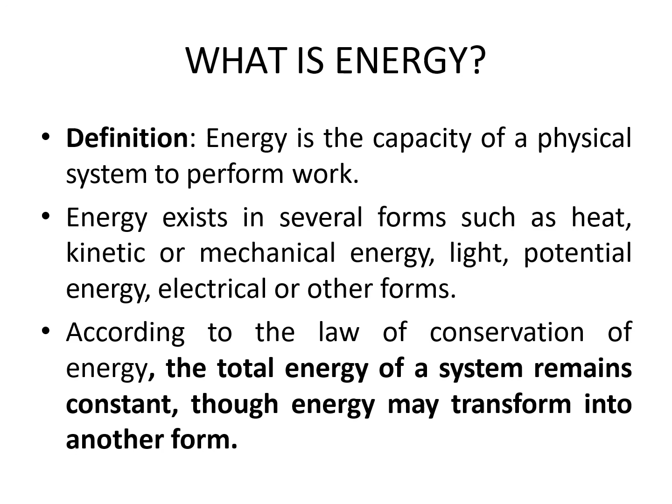Firstly, we discuss what is energy. Energy can be defined as the capacity of a physical system to perform work. Energy exists in several forms such as heat, kinetic or mechanical energy, light, potential energy, and electrical energy, or other forms. According to the law of conservation of mass or energy, the total energy of a system remains constant, though energy may transform into another form.

Next we'll discuss the types of energy. After the definition of energy, firstly we need to know what types of energy exist. Types of energy include mechanical energy, thermal energy, nuclear energy, chemical energy, and electromagnetic energy.

Mechanical energy is the energy that results from the movement or location of an object. Mechanical energy is the sum of kinetic and potential energy. Next, thermal energy or heat energy reflects the temperature difference between two systems.

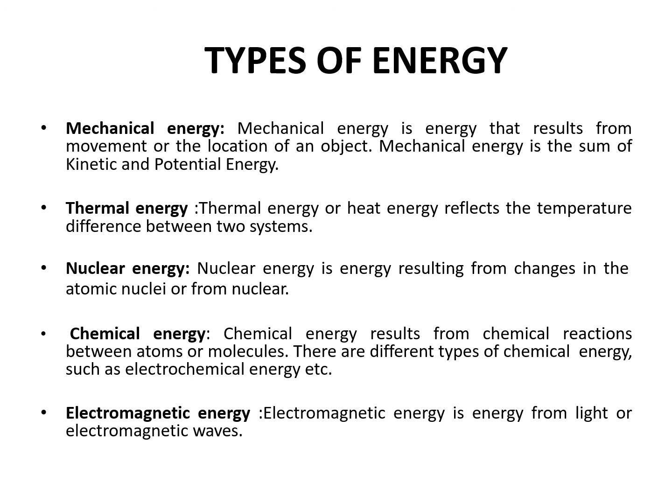Next is nuclear energy. Nuclear energy is the energy resulting from changes in the atomic nuclei. Chemical energy results from chemical reactions between atoms or molecules. There are different types of chemical energy, such as electrochemical energy, etc. Electromagnetic energy is energy from light or electromagnetic waves.

Now we discuss the definition and objectives of energy management, since today's lecture is on energy management and audits. So firstly, we look at what is the definition and objectives of energy management. The fundamental goal of energy management is to produce goods and provide services with the least cost and least environmental effect. This involves the judicious and effective use of energy to maximize profits, minimize costs, and enhance competitive positions.

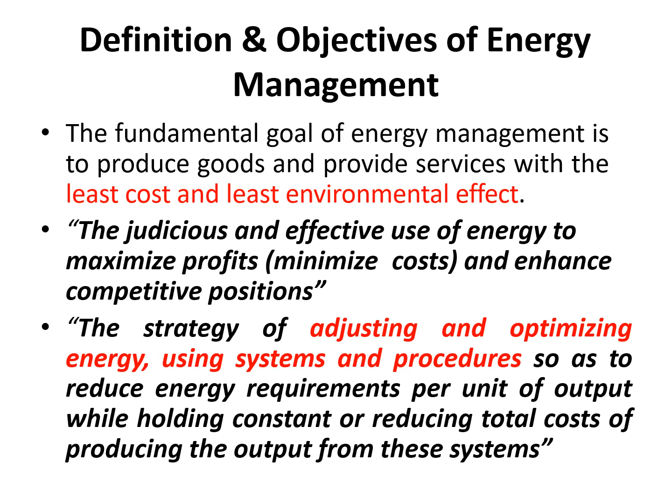Also, under the definition of energy management, it is the strategy of adjusting and optimizing energy-using systems and procedures, so as to reduce energy requirement per unit of output while holding constant or reducing the total cost of producing that output from these systems.

The objective of energy management is to achieve and maintain optimum energy procurement and utilization throughout the organization. This is the main object of energy management. Next is to minimize energy cost and waste without affecting production and quality. Next is to minimize environmental effects, which is also one of the main objectives of energy management.

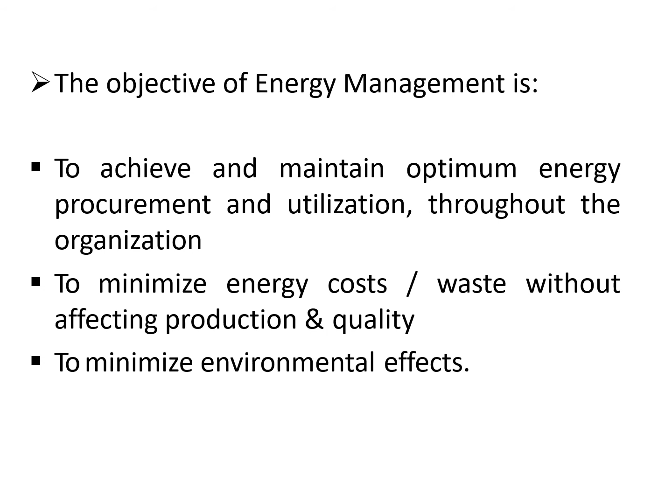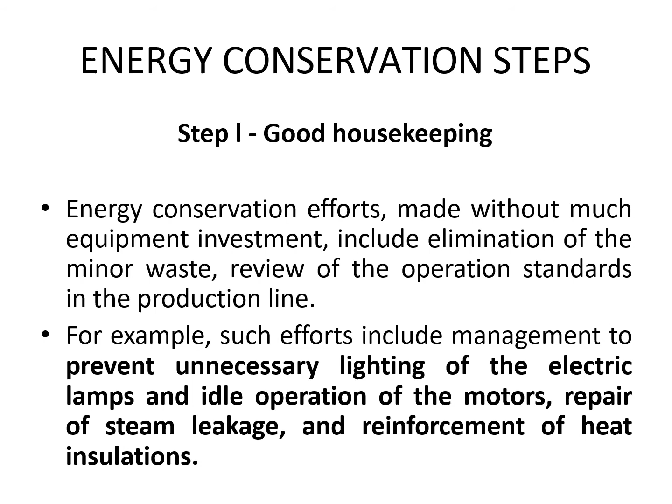Next we'll discuss energy conservation steps. The first step of energy conservation is good housekeeping. Energy conservation efforts made without much equipment investment include elimination of minor waste and review of operation standards in the production line. For example, such efforts include management to prevent unnecessary lighting of electric lamps, idle operation of motors, repair of steam leakage, and reinforcement of insulation.

Next, step 2 discusses equipment improvement. Step 2 of energy conservation involves improving the energy efficiency of equipment by minor modification of the existing production line, providing waste heat recovery equipment and gas pressure recovery equipment, or by introduction of efficient energy conservation equipment, including replacement by advanced equipment.

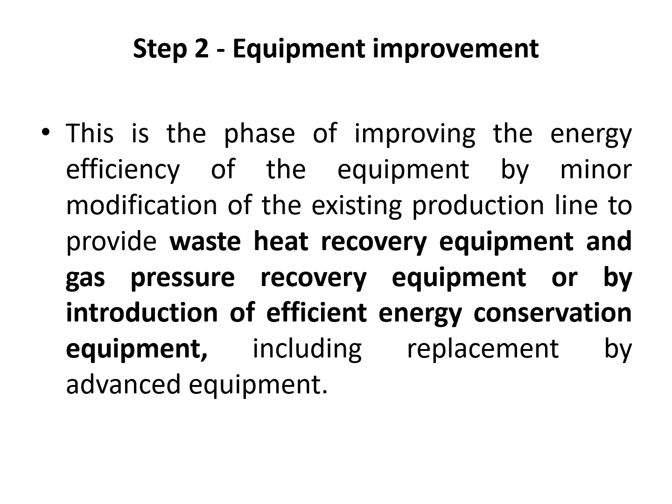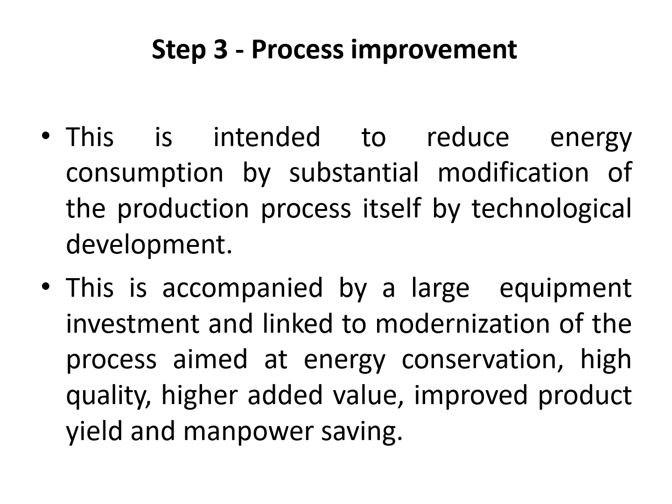Step 3 of energy conservation is about process improvement, to reduce energy consumption by substantial modification of the production process itself through technological development. Process improvement involves a large number of equipment investments linked to modernization of the process. The main aim of energy conservation is high quality, higher added value, improved product yield, and manpower saving.

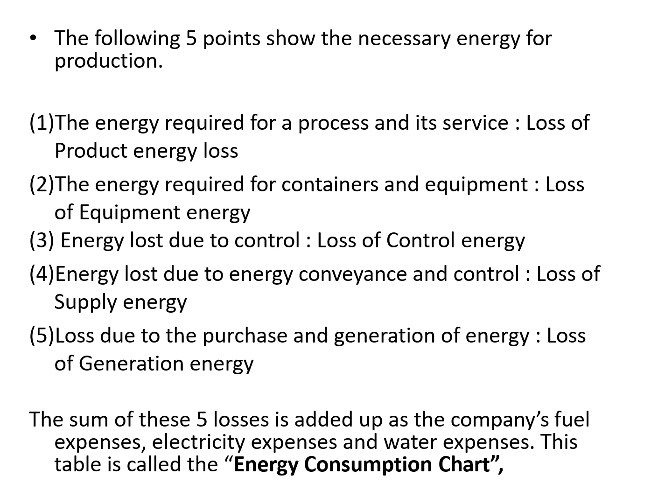So the sum of these five losses is added up as the company's fuel expenses, electricity expenses, and water expenses. This table is called the energy consumption chart.

Next, energy management is the process of monitoring, controlling, and conserving energy in a building, organization, or processing steps. Energy management systems are also often commonly used by individual commercial entities to monitor, measure, and control their electric building loads. These systems can also provide data that allows them to make more informed decisions about energy activities across their sites.

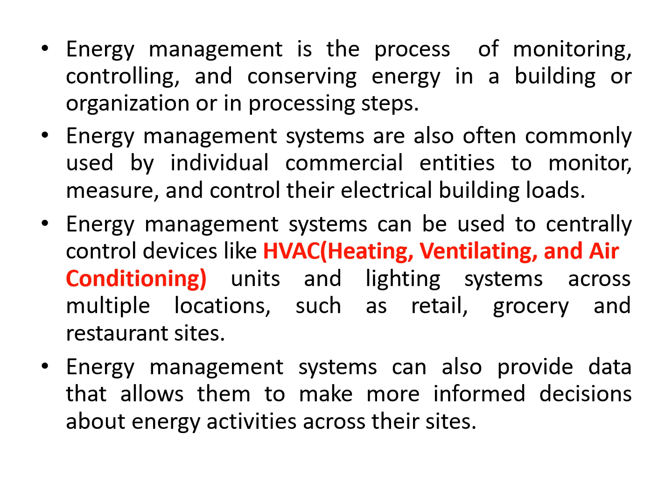Next, this is the tabulated chart of energy management in different sectors and different steps. We'll see this table for liquid and dry milk.

Also see the sector of sugar in different recovery of waste heat of filter in set of boiling pan stir, or also we see in the equipment sector, that is boiler.

In step 1, we see liquid milk and dry milk. So in first step, repair of steam leakage, combustion control, maintenance of the burner or nozzle. In second step, we see liquid and milk, dry milk case, waste heat recovery of drainage, preheat of feed water, modification of flash tank, insulation of boiler and valves also.

So this is the classification of energy management in 2 or 3 sectors, classified with the help of different steps, in liquid milk or dry milk case, in bread sectors or in beer sector.

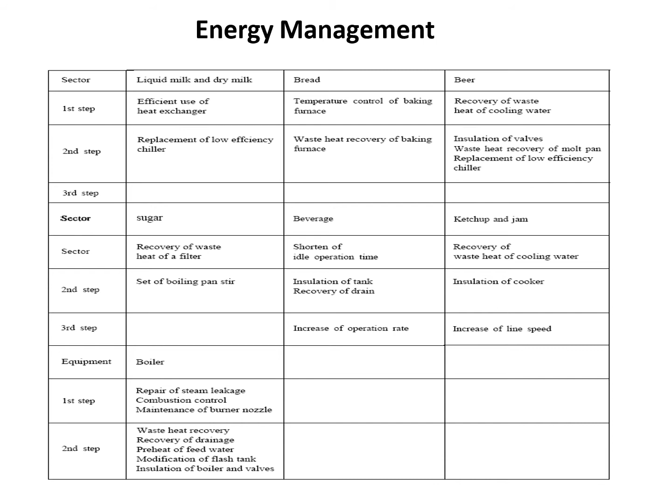Next we'll discuss energy conservation techniques in boilers. In first step, waste heat recovery is the most important technique for energy conservation. Loss of thermal energy occurs in boilers, and the waste gas heat in the chimney is particularly large. It is recovered by installation of an economizer in the chimney to preheat the feed water.

Next, energy conservation techniques will include combustion conditions. These are defined by fuel oil sprayed into the furnace from the sprayer nozzle of the burner tip. Controlling the diameter of the nozzle tip is important, because if the diameter is increased by 20%, the spray particles get bigger and more excess air is necessary to complete combustion.

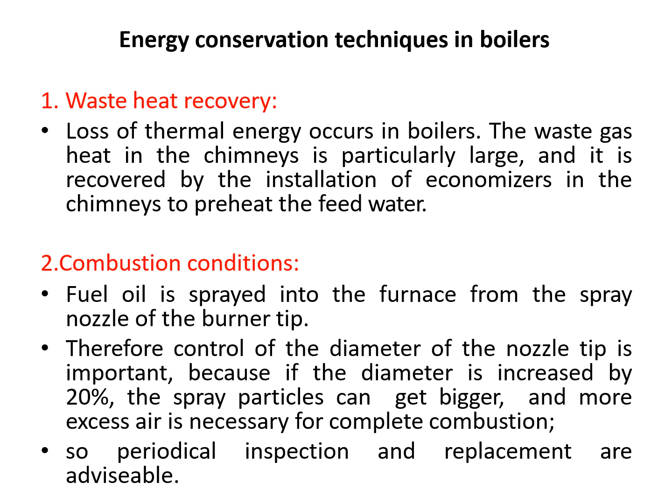So this is the point to point classification about energy conservation techniques in boilers.

In steam leakage, next we'll discuss. Steam generated by a boiler is passed through a pipe common to the adjacent boiler before being sent to the factory. So even when a boiler is not running, it is heated if there is a gate valve water leak, and this involves a loss.

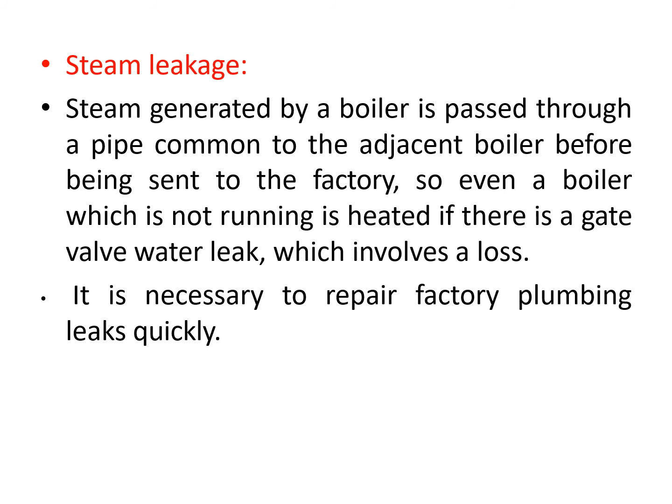So it is necessary to repair factory piping leakage quickly at different points.

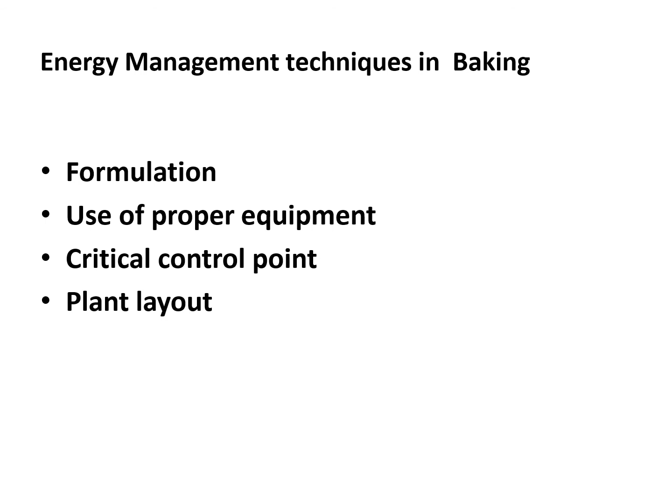Next, we'll discuss energy management techniques in baking. There are 4 points here: first is formulation, second is use of proper equipment, third is critical control point, and fourth is plant layout. In baking technique, we plan the energy management planning process with the help of different points.

Firstly, appoint an energy manager or energy team and assign responsibilities. Second, define the goals of the analysis, system boundaries, collection of data, and develop input and output analysis with the help of a flowchart. Set up the basis for the energy information system, and prepare a register of legislation, developing the energy management manual.

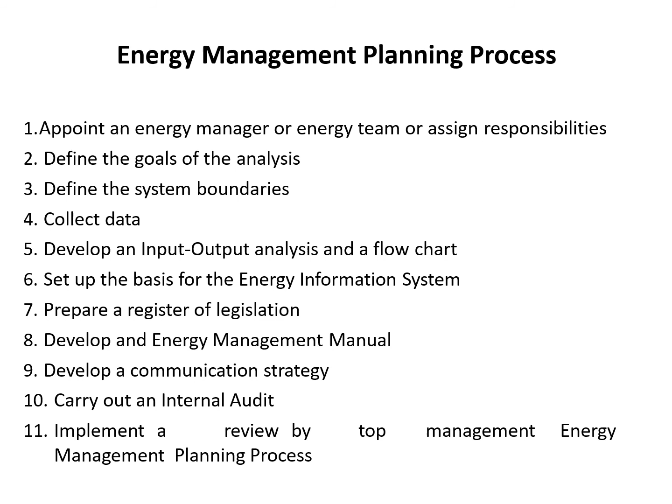Next is to develop a communication strategy, and carry out an internal audit. Last is implement a review by top management of the energy management planning process.

Now, the basic objective of any energy management system is to answer 5 simple questions: how much energy is consumed, how is the energy consumed, where is the energy consumed, when is the energy consumed, and what is the quality of the energy consumed.

So in order to address these queries, energy audits are conducted. Let's understand about audits.

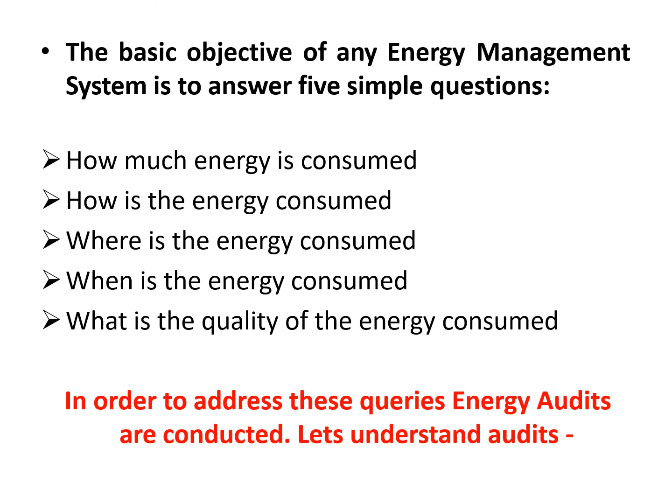Energy audit: type and methodology of energy audits. Energy audit is the key to a systematic approach for decision making in the area of energy management. In energy audit, we discuss different types, attempting to balance the total energy input with its use, and it serves to identify all the energy streams in a facility. Third, it quantifies energy uses according to its functions. So these are the different types of energy audits.

In industry, energy audit is an effective tool in defining and pursuing a comprehensive energy management program.

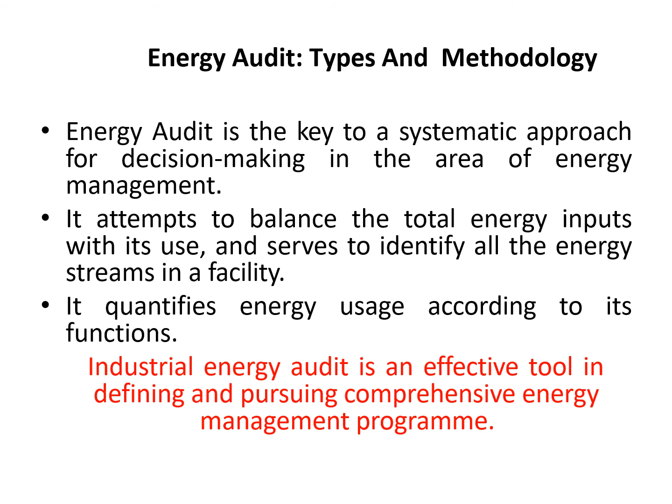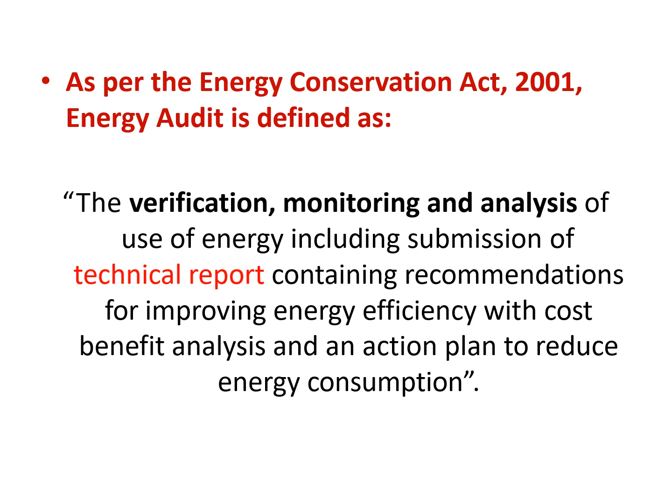Next, as per the Energy Conservation Act 2001, energy audit is defined as the verification, monitoring, and analysis of use of energy, including submission of a technical report containing recommendations for improving energy efficiency with cost benefit analysis and an action plan to reduce energy consumption.

Next, we'll discuss the types of energy audit.

After defining the objective of energy audit, we'll discuss the types of energy audit. The type of energy audit to perform depends on different points: the function and type of industry, the depth to which the audit is needed, and the potential and magnitude of cost reduction desired.

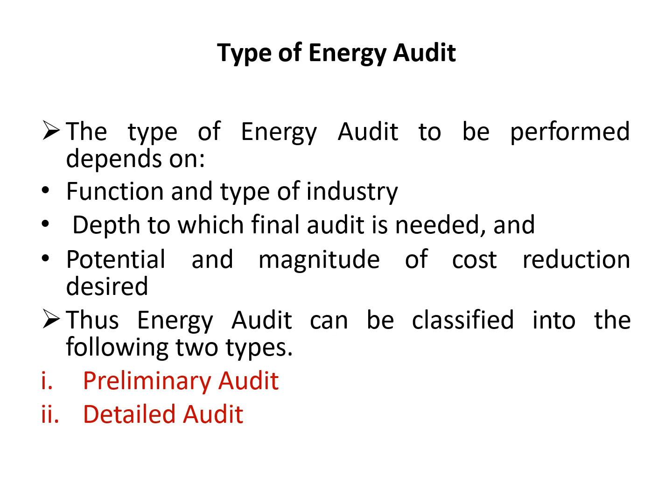Energy audit can be classified into two types: preliminary audit and detailed audit. First, we'll discuss the preliminary audit.

A preliminary energy audit is a relatively quick exercise with the help of different points: to understand energy consumption in the organization, identify the scope for saving energy, identify the easiest areas for attention, identify especially no-cost or low-cost improvement savings, and set a reference point for preliminary energy audit.

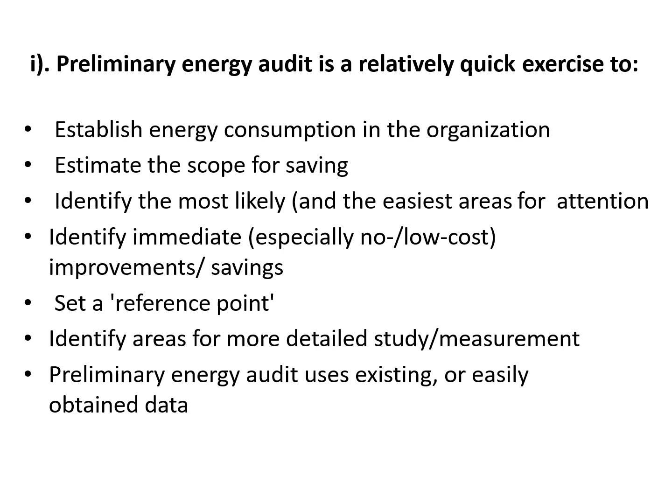The preliminary energy audit uses existing or easily obtained data, and also helps identify areas for more detailed study in energy audits.

Second is the detailed energy audit methodology. A comprehensive audit provides a detailed energy project implementation plan for a facility, since it evaluates all major energy using systems.

This type of detailed energy audit offers the most accurate estimate of energy saving and cost. It considers the interactive effect of all projects, accounts for the energy use of all equipment measures, includes detailed energy cost saving calculations, and also defines the project cost.

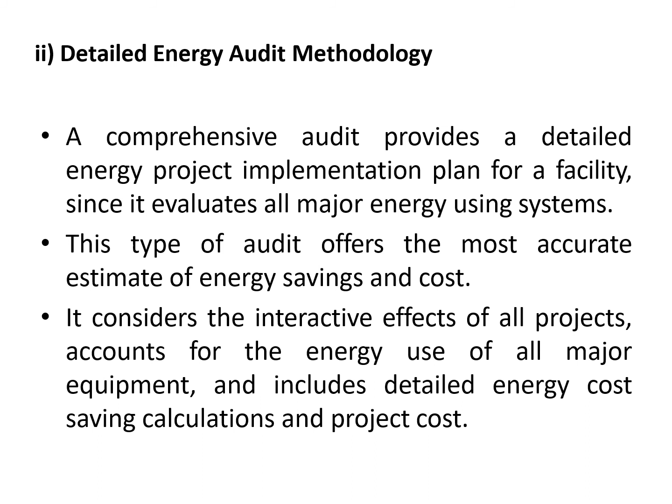After the detailed energy audit, we'll discuss how auditing is carried out in three phases, as a basic part of the detailed audit discussion.

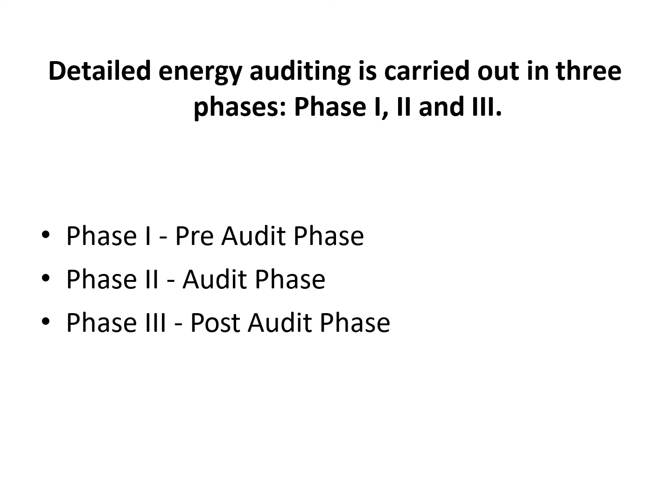A detailed energy audit is carried out in different phases: phase 1, phase 2, and phase 3. Phase 1 is the pre-audit phase, phase 2 is the audit phase, and phase 3 is the post-audit phase.

Phase 1, the pre-audit phase, involves planning and organizing informal interviews with the energy manager, production manager, and plant manager. It also involves conducting a brief meeting or awareness program with all divisional heads and concerned persons.

Phase 2 is the audit phase. It includes preliminary data gathering, process flow diagrams and energy utility diagrams, conducting surveys and monitoring, analysis of energy use, cost benefit analysis, and reporting or presentation to top management.

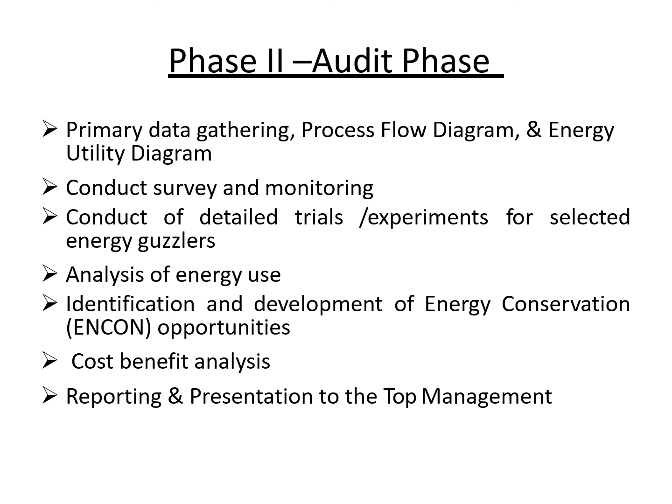Phase 3 is the post-audit phase. In this phase, implementation takes place along with follow-up.

The information to be collected during the detailed audit is classified into points 1 through 8: energy consumption, material balance data, energy cost, process and material flow diagrams, generation and distribution of site services, sources of energy supply, potential for fuel substitution, and energy management procedures along with energy awareness training programs within the establishment.

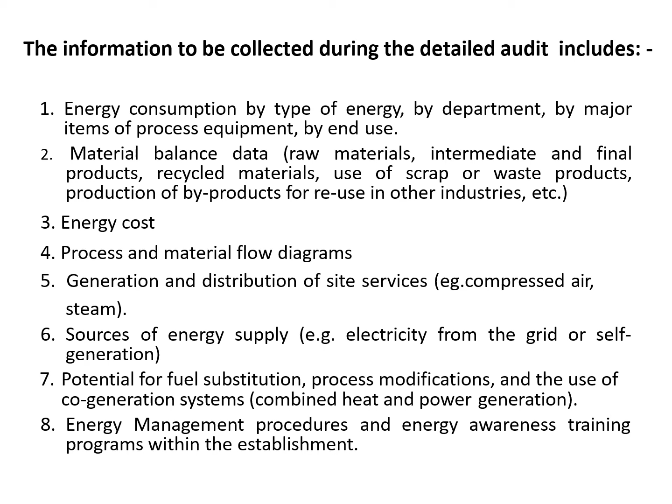This is the information to be collected during the detailed audit. Next is the audit team—the audit team should collect the following baseline data.

Points include: technology, processes used and equipment details, capacity utilizations, and the amount and type of input material used in energy management, such as water consumption and fuel consumption.

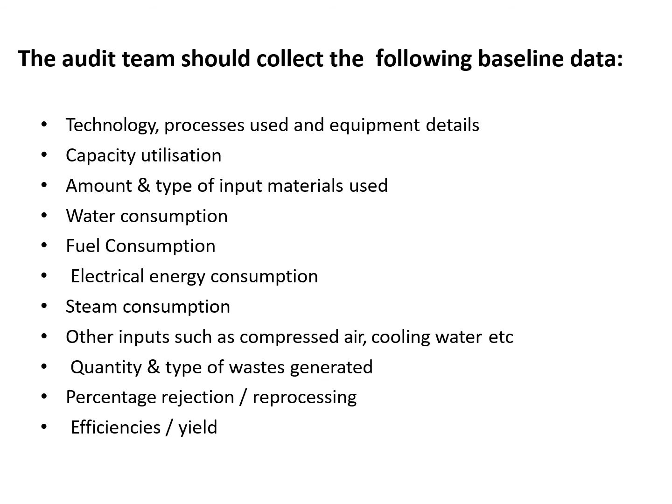Also included are electrical energy consumption, steam consumption, and other inputs such as compressed air and cooling water, etc., the quantity and type of waste generated, percentage rejection, and efficiency yield.

Next, we'll discuss energy audit instruments. The requirements for an energy audit, such as identification and quantification of energy necessitates measurements, which, require the use of instruments.

These instruments must be portable, durable, easy to operate, and relatively inexpensive. The parameters generally monitored during energy audit may include the following basic parameters: basic electrical parameters and other parameters of importance.

Other than electrical parameters, these include temperature, heat flow, radiation, air and gas flow, liquid flow, revolutions per minute, air velocity, noise, dust concentration, total dissolved solids (TDS), pH, moisture content, relative humidity, flue gas analysis, CO2, O2, carbon monoxide, SOx, NOx, combustion efficiency, etc.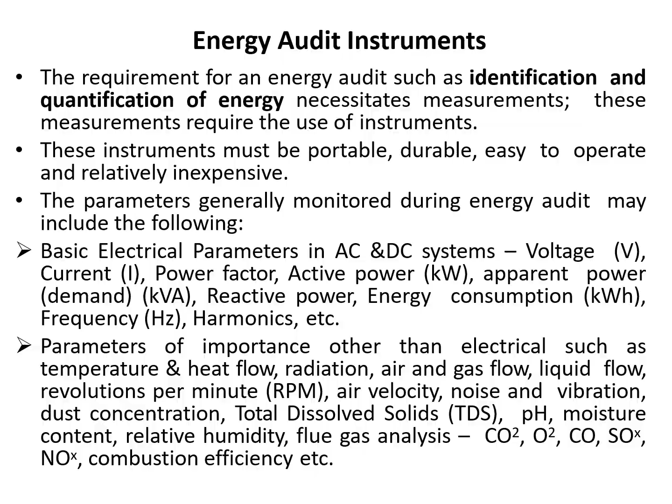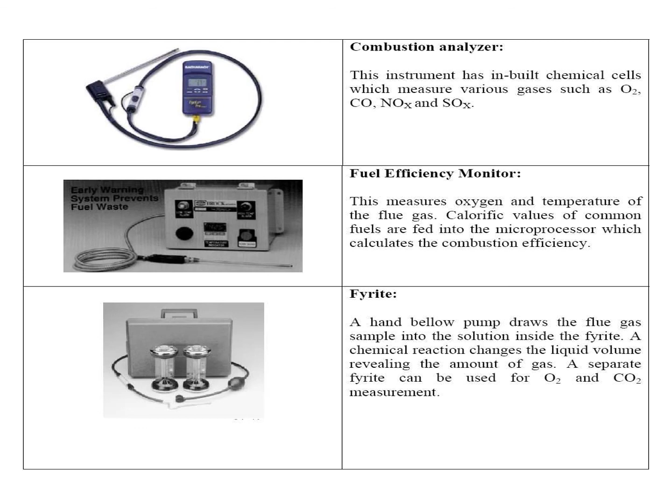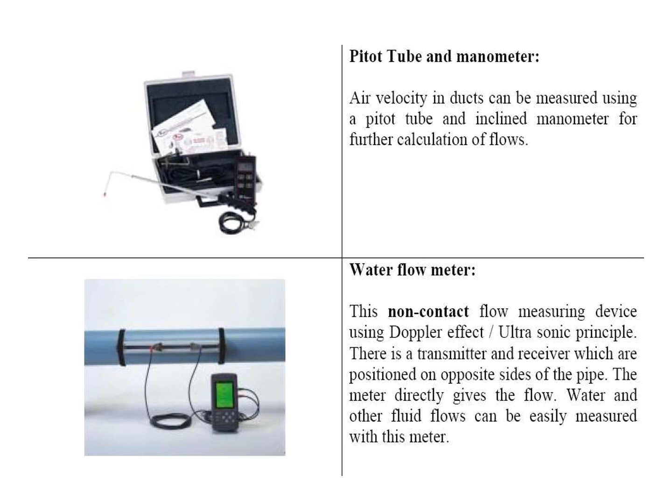These are the different types of instruments used for energy audit: combustion analyzer, fuel efficiency, fyrite, contact thermometer, infrared thermometer, pitot tube and manometer, water flow meter, speed measurement, leakage detector, and lux meter. So these are the basic instruments used for energy audit, also used in the energy management area.